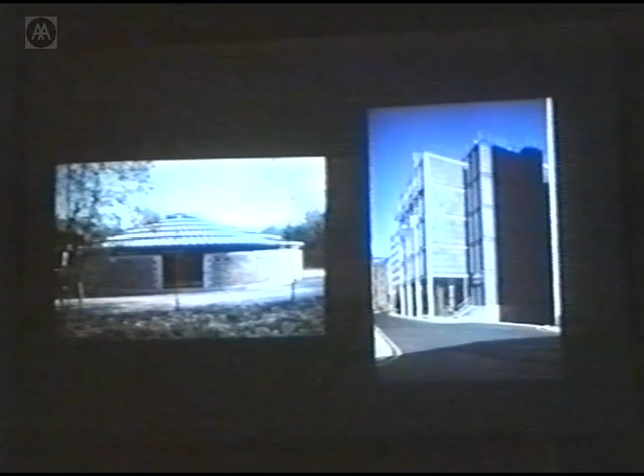This was a building where the name of the game was doing the project quite quickly and very freshly. And it's quite interesting how on other buildings you can use the same materials and some of the same techniques, and they come out with a completely different and perhaps more subtle interpretation. Whereas here, what I liked was the directness of the building.

The site of the building was in Docklands. It's Shad Thames, just near St Saviour's, facing onto St Saviour's Dock. And what we found was the buildings on the right-hand side, and in fact the site was this building and a bit of this. And we had very protracted negotiations with English Heritage to demolish the building on the right, because it was about the only old building in the area, but in fact it had been built for child labour and storing sacks, so there was only a headroom of about 1.7 metres, and it was impossible to use for any other use at all.

And we had absurd conversations with the conservation officer, who was nearly 2 metres tall, who said it's perfectly capable of reuse and was sort of hunched double inside this building. But eventually, after about a year, 9 months of negotiations, we managed to get permission to demolish it on the basis that the replacement building would be an improvement.

The use of the building is really quite simple. There was an apartment on the top, 3 floors of offices, and what was to be a workshop on the bottom floor. Sorry, the slide on the right is wrong. No, it is the right way around. I thought it was the wrong way around.

The plan really was developed around the apartment, and we developed quite a simple format where it was based around a number of individual rooms and bedrooms on the street side, a double height space in the middle that led up to roof terraces, and then living rooms on the other side of the building with bathroom spaces.

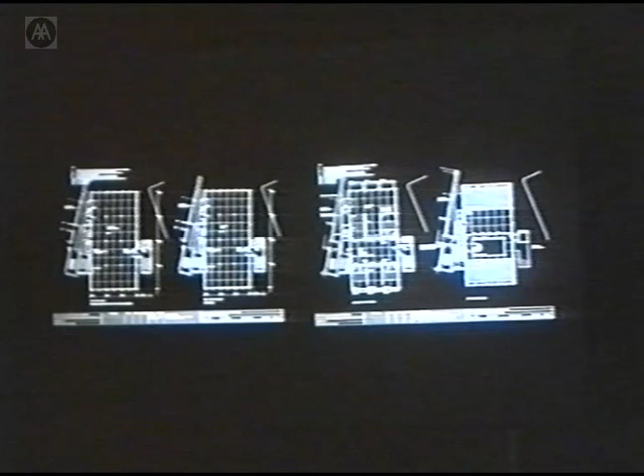And that really dictated the plan form, because that was the most onerous part of the building. It dictated the plan form for the rest of the floors, where the offices and the workshops had much less onerous uses. So we arrived at the plan and the format relatively quickly, and this shows the components of the building, where we had the 3 floors of offices in the middle, the apartment at the top, and the showroom at the bottom with a basement car park.

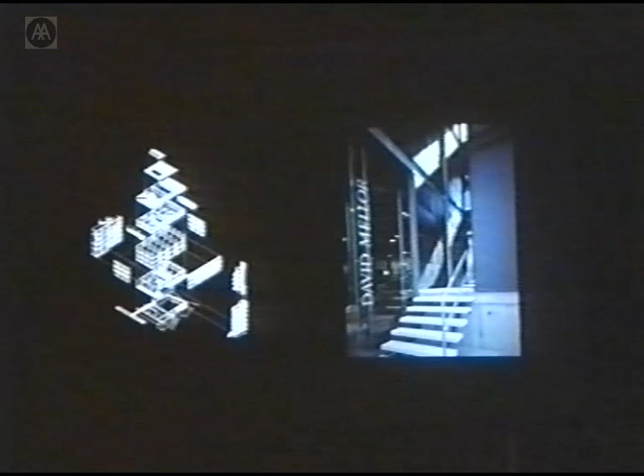And then the construction concept was relatively simple. We had a concrete frame in the middle of the building, the main block, with a freestanding lift tower up the side, and then external cladding panels just clipped into the frame, with a sort of leftover space for services and cores against the party wall. And really the challenge was how to make the best expression of this very simple plan using a relatively limited palette of materials.

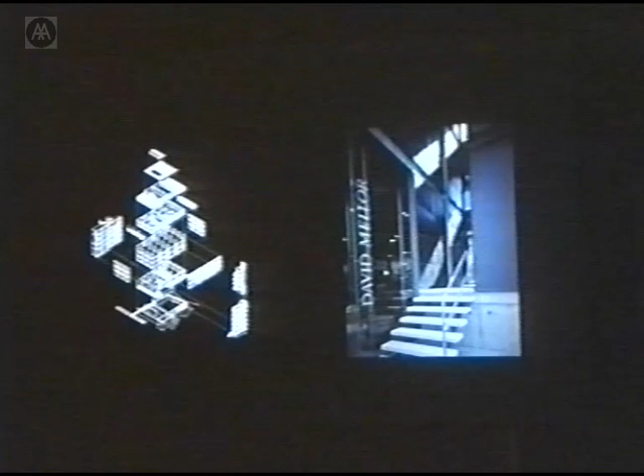And in the end, we settled on 4 materials, which were steel and glass, lead and concrete. And you can see them all in this picture. There's the concrete, and then there's the steel for the lift shaft, and the lead panels, and the glass for the windows. And I think in many ways the materials, taking the sort of culinary metaphor, the steel and glass were very familiar to us. All our upbringing as a practice had been on steel and glass. We knew it very well. It was second nature to us. It's like the sort of sauce that you put into every standard dish.

And then the lead, in a way, was something that was in season, because we'd just had an experience with David Mellor on the Hathersage building, where we had a lead roof, which was prefabricated in panels. And then the interesting one, and really the essay that we developed on this building, was concrete, and how to get maximum expression out of concrete. It was like the sort of forgotten ingredient at the back of the cupboard that needed to be reinterpreted into something more interesting than most associations one has on recent projects.

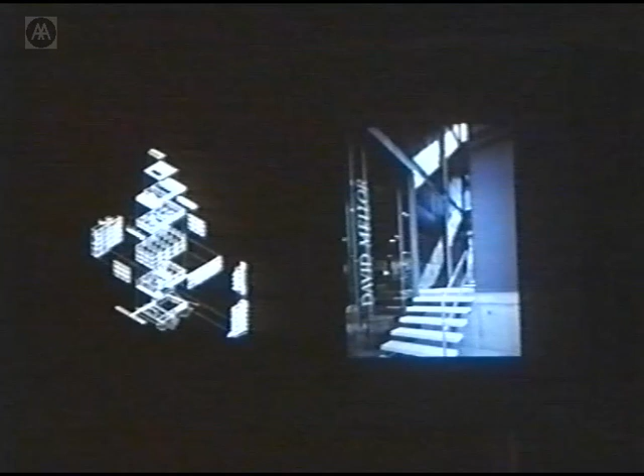And in many ways, the biggest inspiration for us as a starting point was this building by Louis Kahn, the Yale Center for British Art. What appealed to us was that here was a building with a very limited palette, the multi-story concrete frame, that would solve very efficiently all the fire resistance problems, and the concrete also has the potential to provide a fair face finish. In this building, the panels on the side were matte, mill-finished stainless steel, and then inside there's joinery. And that's what we set out to use.

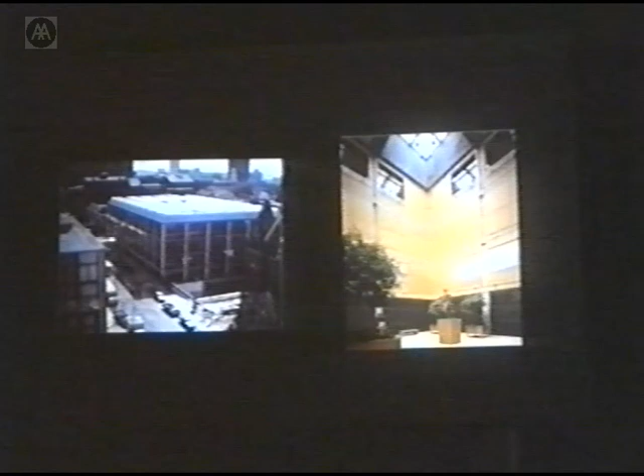We had a romantic notion that with David's work in manufacturing cutlery and the use of stainless steel, somehow we could redeploy that technology on this building. And likewise, we thought at first that we would reuse the timber from the demolished warehouse on the site for the panels inside the building. But in fact, neither of those 2 ideas survived. Interestingly, Louis Kahn himself likened the stainless steel panels on the Mellon Centre to lead or pewter. And we had this immediate experience using lead, so that became the main material of the cladding.

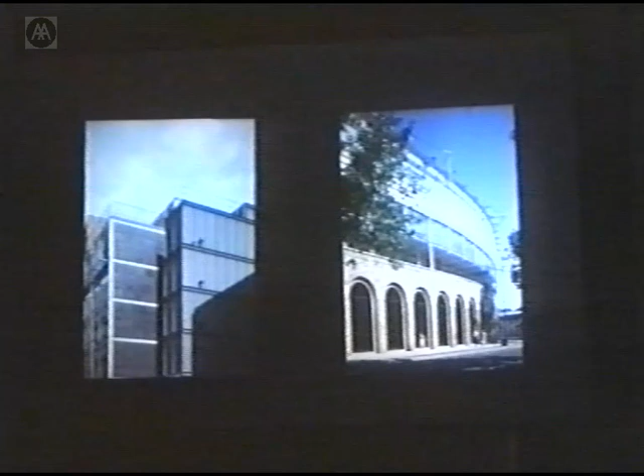Just going through the materials, quite a lot of our work is that we take an ingredient that we've already developed out of the back catalogue. If you take the lift tower here, which is an all metal plate solution, this was something that we'd first developed on Lord's Cricket Ground, where we hit on the idea for a very long span structure. Your structure would also form the enclosure to the building, and you could do that very efficiently, and the aesthetics are developed from the pattern of web stiffeners that you need in the thin steel plate. You use a standard thickness of steel plate and weld web stiffeners on.

And we did the same here. In fact, on Lord's, at the end of the stand, there was a lift tower that was just delivered to site in 2 sections and stacked on top of each other. And we took the same thing on this building as a sort of ready-made solution. We can only really manage one new idea on every project. We start off with a lot of ideas that we've developed on previous projects, use them again relentlessly, and then try and develop something new. And this was one that we weren't going to develop on this project.

And you can see at Lord's, this is a shot during construction where we had the plate girders, which spanned 18 metres along the length of the stand, and they formed an enclosure to the service rooms, which are below the top viewing deck, and below the plate girders were suspended the boxes and the dining rooms.

And then inside the building, this is the Shad Thames building, you didn't need anything. You just had the plate steel, which was painted. We didn't need to insulate it because it wasn't a heated space. And we strongly believe in not solving problems that you don't need to solve. So why bother with insulating it and all the conventional paraphernalia of construction?

This is really a sort of cross-channel ferry aesthetic where you just bolt things onto the hull of the ship. And I think a lot of the inspiration we had for this was from shipbuilding. And in this case, they were bolted together in storey-height sections.

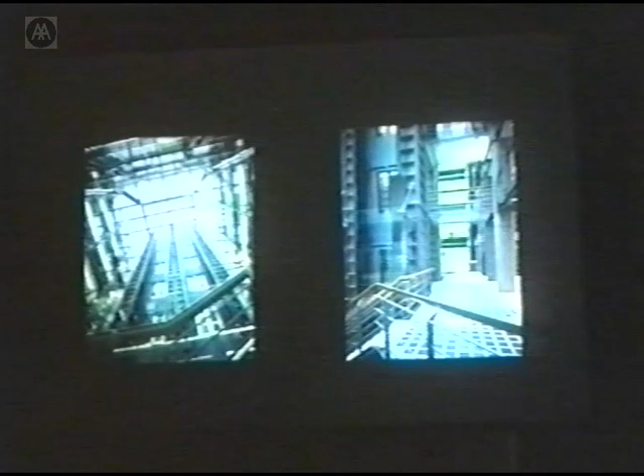And you can see how we've used this idea again at more or less the same time at Bracken House. This is the atrium in Bracken House where we had the lift shafts that supported the roof structure, and they were again plate steel.

And then in the Shad Thames building, the lift shaft, and it takes a lot of courage with this architecture where nothing else is going to happen to it, and the site looks like a pigsty while you're building it, and you see what are supposed to be finished components, and they don't look very impressive when you put them in place, and you just have to believe that it's going to be all right at the end of the day.

But here they were just delivered off the back of a lorry and put on top of the foundation and stacked on top of each other, and then the stairs and the lifts were all fitted out inside.

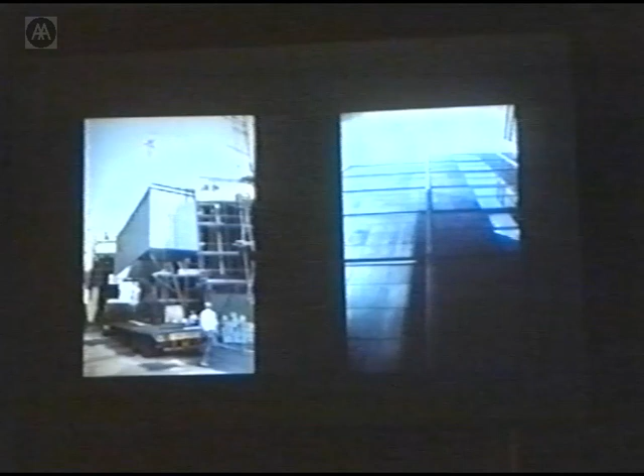So then the next detail and the next technology that we took out of our back catalogue were the lead cladding details. And this is the Hathersage building we did for David. And this roof was made of plywood, stress skin plywood panels that were hooked onto purlins. And then there was a lead covering on them. And in fact, they were all made by David Mellor himself. He was very much involved in a lot of the fabrication of both this earlier building and particularly this later building.

And I think it was the confidence that we had, we got to know lead, and we rather liked the idea of a material, unlike a lot of the materials of the modern movement in architecture, which get worse with age. Lead and non-ferrous metals actually improve with age. They develop a patina, and the appearance in many ways improves. But on this building, we were going to use it as cladding in a similar way to the Khan building, but with panels on the side of the building.

And what intrigued us here was David's background of working with metals, I think he trained as a silversmith, he tortured this metal into something with knife-edge creases, quite unlike normal lead on roofs. And you can see these razor-sharp arrises on the joints. And that, for us, was a revelation. Because one is so put off by lead conventionally on buildings, this metal that's rather difficult to control, and it looks as if it's got the better of the people who are working on it. But here there was a fantastic precision to it, and that we found a complete revelation.

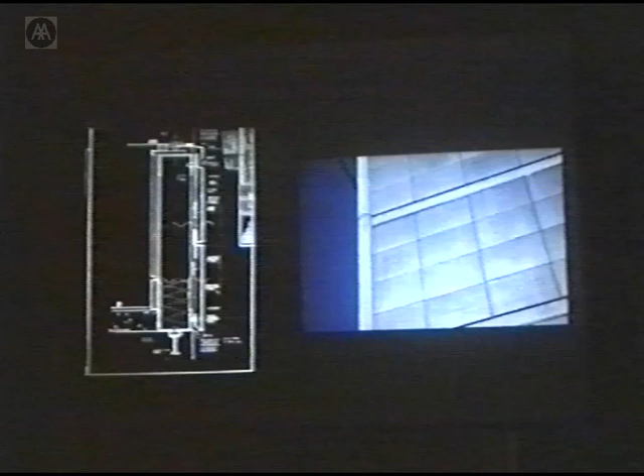And this shows some of the details where we had a ventilated void in the cladding, and David manufactured all these panels, and they were in galvanized steel frames. But in the end, we had plasterboard on the inside instead of the wood panels that we'd hoped for at the beginning. And this is another. This is an internal view where you can see the framework that supported the panels.

And then this was a detail that we used again relentlessly in other projects, having developed it on this one. On the left is the Glyndebourne Opera House, where we had similar lead panels cladding the fly tower. And in fact, the roof is really a straightforward development of what we'd done on the Hathersage building. And then again on the Inland Revenue, there are lead panels up on the top floor. This is in Nottingham. And there's a lead roof again. So this project proved to be an important development of that part of our architectural vocabulary.

And then the next thing that we took out of our back catalogue was glazing, and what we were looking for were just big, simple sliding windows where the building would be naturally ventilated. We wanted the maximum area of glass because the two side walls of the building are relatively solid and the ends were glazed, so light had to penetrate a long way into the building.

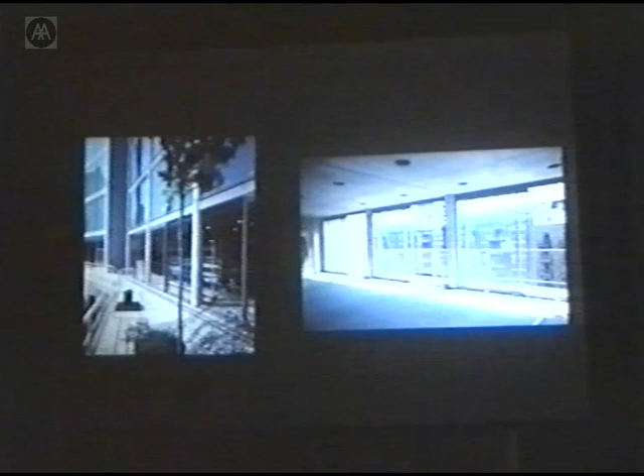And what we used was the system that we'd first developed on the Schlumberger building, where we in fact tried to reinvent far too many things, but we managed to get away with most of them. But on this one, we had again big, over 3 metre high, effectively patio doors, and we thought, well, we'll just use patio doors, but in fact, you find they're never built for anything higher than about just over

2 metres. And so we had to develop a whole new glazing system with Schuco, a German manufacturer, with 13 new extrusions, which had to be robust enough to span the 3 metres and could support this large area of glass. And that was something that we developed on the Schlumberger project, and having sort of sorted that out on that project, it was a pity not to use it again.

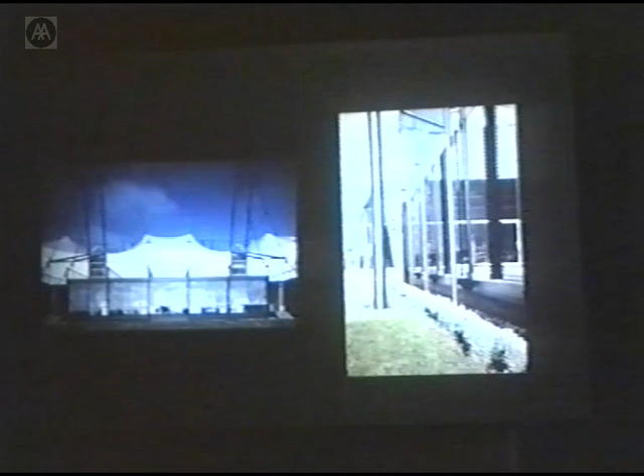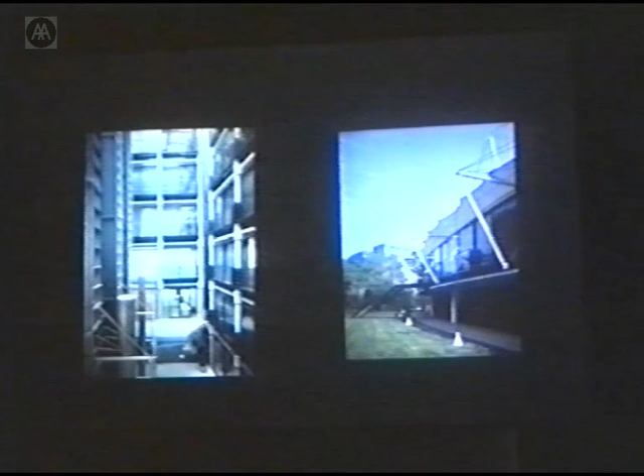And we used it not only on David's building, but Bracken House in the middle atrium space. There were these balconies that faced out onto it with these same extrusions. And then at the Inland Revenue Centre in Nottingham, on the amenity building, we used the same extrusions again. So on David's building, it was just an interim step on the way of something that we had already worked

out. And then again on the roof glazing, we had a ready-made bit of the vocabulary, which was really a patent glazing system that didn't need any secondary support, and we'd first used that on the Schlumberger building at Cambridge, and this gave a very structure-free double-height space in the apartment level of the building.

But the real challenge on the project was concrete and how we could express the properties of concrete. And we'd become very disillusioned with the way that concrete's used in buildings. 90% of buildings you see put up have it concealed behind cavities, behind suspended ceilings, behind curtain walling. You never see the structure.

And the whole concrete industry had become very de-skilled, because no one, since the National Theatre virtually, had ever asked for fair-faced concrete. And no one was used to producing good concrete. But in the aesthetic of this building, where we were stripping everything back, peeling all the layers off the building, everything that was unnecessary, we were anxious to find a way of expressing what the nature of the material is.

And our only previous project that we used concrete on was the Solid State Logic building in Oxford, which was a very simple first floor slab, but it had coffers in it, which you can't see in this photograph, which we cast light fittings into. And on this project, we really wanted to take it a step further.

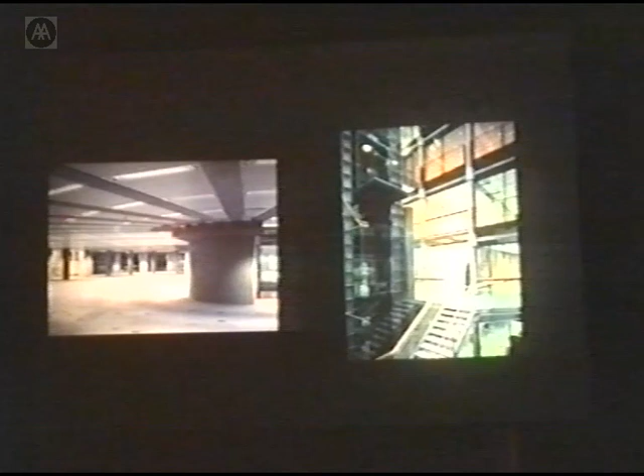And in Bracken House, we had these clear office areas with these columns on a 3.6 metre grid. It was on a radial plan, and they formed cellular rooms around the outside, and the beams were expressed in a very fine precast concrete in the ceiling, and then the ceiling formed air ducts and lighting between the beams. And so we'd had a limited amount of experience with precast concrete.

But in David's building, we were really after something that would express the concrete as a more plastic material. And in fact, I recommend reading Nervi if you want to get enthusiastic about concrete. He's incredibly poetic, and he wrote a book which in English is translated to Structures, but the Italian original means building correctly. He sort of says it with certainty, and it sort of goes from the sublime to the ridiculous.

He talks about architectural education in general, and then tells you what density of reinforcement you need per cubic metre of concrete. But it's a wonderful book, and he's saying that reinforced concrete is the best structural material yet devised by mankind. Almost by magic, we've been able to create melted stones of any desired shape, structurally superior because of the tensile strength to natural stone. Enthusiasm is dampened by habit, but reinforced concrete deserves a large measure of it.

And in a way, he sort of gave one the way of looking at concrete and how you use it, and what's the nature of the materials you're using. And we often forget that concrete needn't necessarily just be the ready mix that comes out of the truck. Although, ironically, on David's building, we did use ready mix, and we couldn't get a more refined expression out of the raw materials. But basically, concrete is stone that's quarried out and ground up, and then the other components are a lot of joinery, which has to be very finely made joinery, and reinforcement.

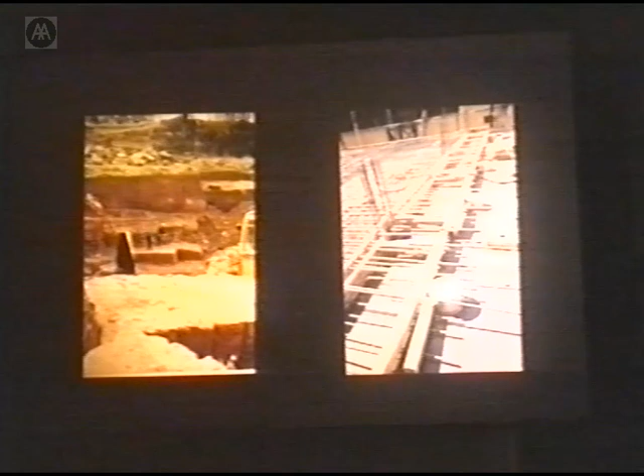The interesting thing on this job was that the client was prepared to really get involved in the whole design and construction process. And we'd identified the key thing about concrete was making beautiful formwork. The concrete is just an imprint of the joinery that you make in the first place. So you have to have a beautiful bit of cabinet work, which is absolutely perfect. And once again, the building site is like the Battle of the Somme or something, but you've got to keep this perfect joinery.

And David Mellor made all the formwork, which was oversized panels of plywood, and with very carefully made joints, which in fact had combinations of aluminium extrusions, which were specially made, and rubber extrusions that were gaskets that were specially made. And all those things created the very subtle features in the slab. It was basically a flat slab. The engineers on the project were Buro Happold, and we worked with Michael Dickson.

And we had a flat slab design, and the essence of it was that the columns and the slab were all monolithic, and we really wanted to see the fact that there was no difference between the walls and the columns and the slab. We were trying to exploit the monolithic nature of the material.

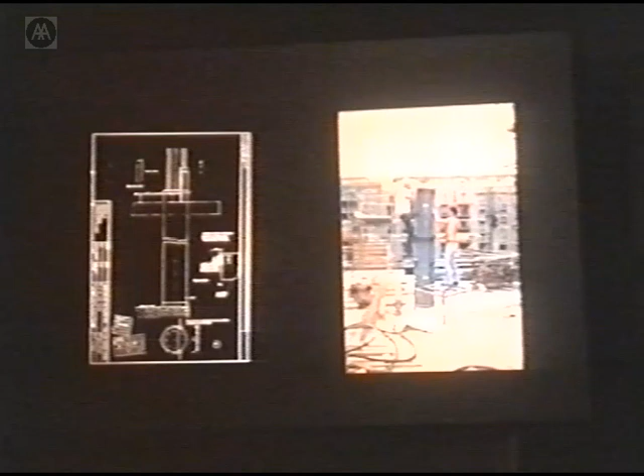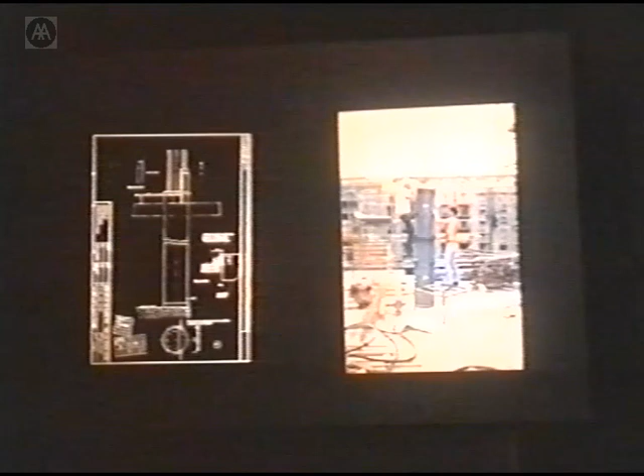And I think what we found, what was incredibly, again, a revelation, was the sort of precision from David's background in manufacturing precision objects, that when they're brought to the building site, we were able to achieve something far better than you could get out of the industry. But the problem was getting the industry to handle the materials properly, because they're not normally used to anyone expecting the concrete to be a finished product.

And we had endless problems with how do you stop the grout loss from the columns, and how do you handle the materials, because everything you do is reflected in the surface of the concrete, and we were anxious not to treat the surface of the concrete in any way. We just wanted to see it as a moulded material and feel the fact that the forms were leaving their imprint in the final building.

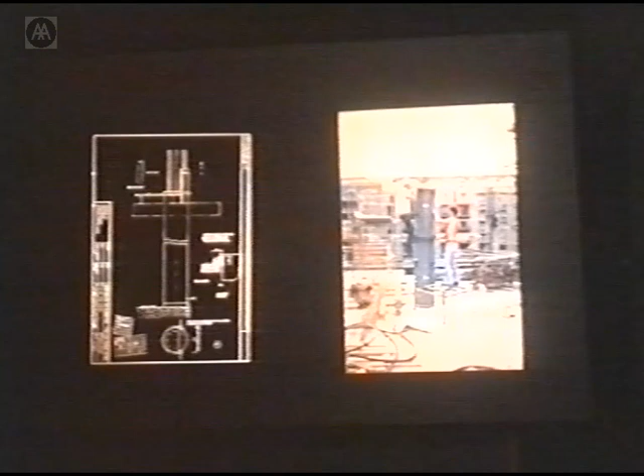And you can see here some of the details. For example, the special rubber collar that was manufactured for this job, and the considerable number of details that were worked out with David. And then you can see again, and these panels needed to be treated with enormous care. You can see here again, this is an aluminium extrusion that was jointing the panels and provided an indentation where we had joints in the concrete between pours.

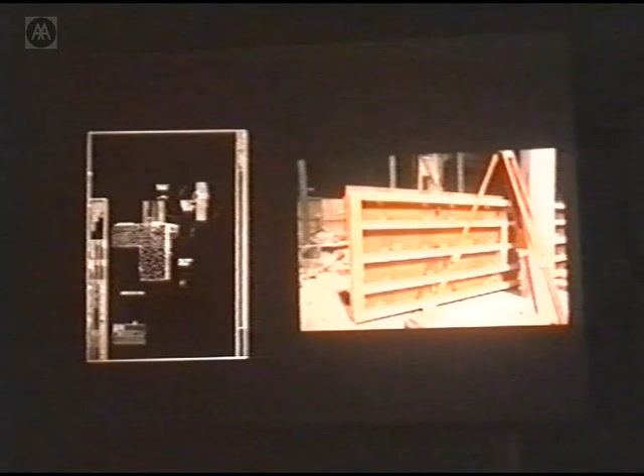And this shows the retaining walls. It's somehow trying to keep a clear head when you're looking on site: what does all this mean on the finished product, and how you can keep it. You've got to keep the forms absolutely clean and in perfect condition, because anything that you do wrong is there for good.

And really, I think the sort of design tools that you need is not just designing it, but it's how to implement the design, because you will never get anything out of it unless you have the method and you can somehow communicate it to the workforce as to what sort of finished result you want.

We had to think about everything, about how the reinforcement was. We didn't want any support off the formwork for the reinforcement cages, so we had these light fittings that cast in, and the reinforcement basically spanned between the light fittings. But it needed a lot of thinking. You had to think about the concrete from the inside out, and then how you pour the concrete.

And we found terrible problems with the type of vibrators that were used, and we asked the Japanese how they did it, and they said they'd given up on all of that, and they just had hundreds of men shoulder to shoulder with bamboo rods compacting the concrete in the bottom of the forms. We could never persuade this contractor to do it, but we could see the reason. For fairface concrete, it's a hand finished job, literally hand finishing.

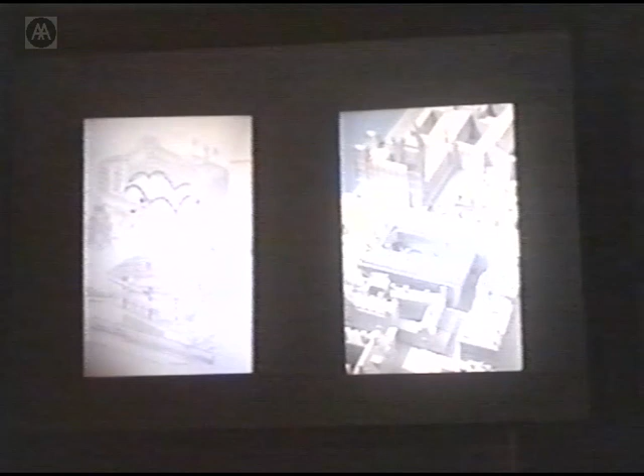Now, it's under the Parliamentary Building, so this is the Parliamentary Building by Big Ben, and at the moment there's a big hole in the ground. And underneath there's this enormous underground box, which is going to be 30 metres deep by 30 metres wide by 70 metres long, where escalators connect the Jubilee Line platforms with the District and Circle Line and the ground. And then above we have the Parliamentary Building structure, which is spanning across onto these 6 columns in the middle.

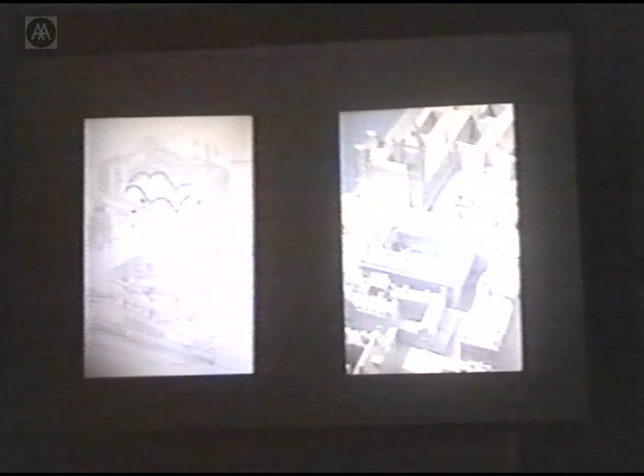But when we came to the techniques of how you construct this underground concrete box, something from that David Mellor retaining wall being demolished stuck in our minds, that actually there's a sort of beauty, like at Petra here in Jordan, where you have these buildings that are carved out of a hillside, and you can see the rock strata running through, that actually you could get some of that feeling of this sort of geology that you're just hacking out below ground.

And when we were talking to the engineers on the Westminster Station job, we discovered that the way that you construct these enormous deep pits is with a diaphragm wall technique, where you excavate in the clay with a grab. This is all engineers' drawing. These are about 40 metres deep, under bentonite, and you excavate this trench, and then you fill it up with concrete.

And what you're using is the clay that's left as the formwork, and then later on you excavate down between the panels of the wall, and then the walls of the station are revealed as the imprint of the subsoil of London, which has formed your formwork. So we thought that this would be the solution. We just accept the fact that that's what the walls are.

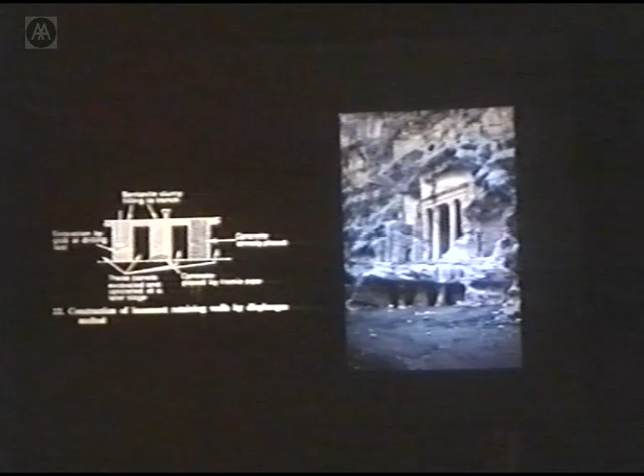And knowing that it was going to be very difficult to control the quality of the concrete, we had almost encouraged them to do these cold joints and these poor mixes of concrete, because you get something of this natural geological effect. And what was quite interesting was at the same time reading Michelucci, who designed this church on the Autostrada near Florence, where he likewise analysed all these old cities, these excavated, natural geological architectures, and he'd done a fantastic blend of natural materials, some formed and some rough, and that was a fantastic inspiration.

And this is the Jubilee Line station, where you have this formed grid of buttresses and waling beams with these flying shores running across the middle of the box, and in these panels here you'll see the imprint of rotten concrete, but purposely rotten and purposely rough, that's used the clay that was excavated away as its former.

Then going on from there, we went on to more structural development of concrete, really regardless of the material properties, what's the structural expression that you can get. At the Compton and Edrich stands at Lord's Cricket Ground, we started developing this aesthetic where you mould the slab to respond to the stresses in the slab, and then the reinforcement pops out of the slab where there's only tension, and you use the concrete where it's good in compression, and the steelwork is pulled out and becomes trusses, which are then embedded in the concrete underneath.

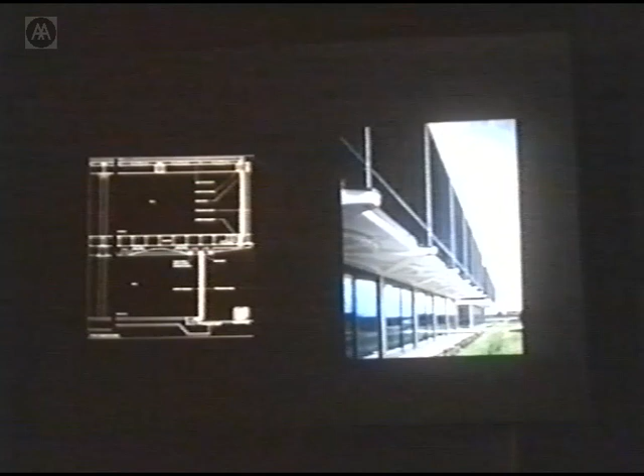And you can see there's the first floor slab, and all the services are up here. It's taking the idea we used on David Mellor's building, where you have the light fittings and the conduits embedded in the slab. Here we would actually form much bigger recesses and express the structural forces in the slab, but also feed the air down from the floor above through holes in the slab, and also embed light fittings in the slab, and once again express it as the structural finish of the building.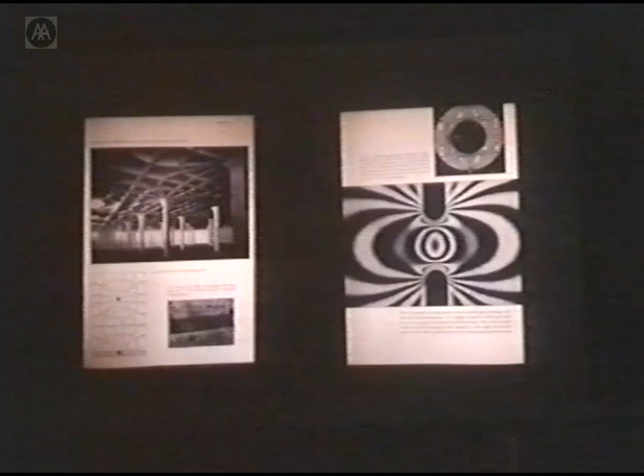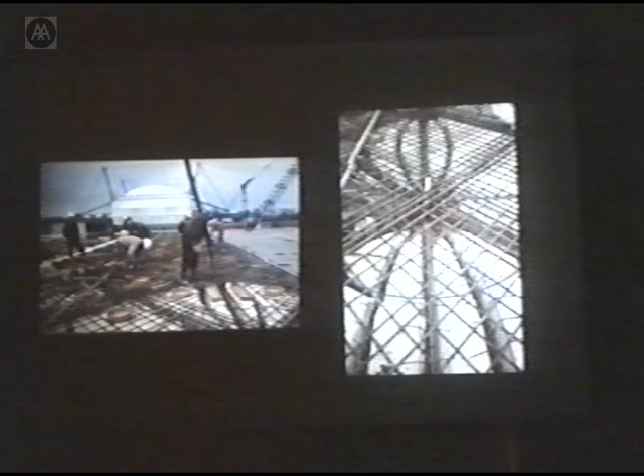And here Nervi had used ferrocement as a permanent formwork that would then form the former for an in situ topping. So we're taking this a step further from David's building. And again, quoting from Nervi, he is very poetic. He can make you really excited about reinforcing rods, because what he says is that you should understand the flow of stress from bar to bar and from reinforcement to concrete so as to channel this flow in the simplest and most natural ways. And the pattern of steel should always have an aesthetic quality and give the impression of being a nervous system capable of bringing life to the dead mass of concrete.

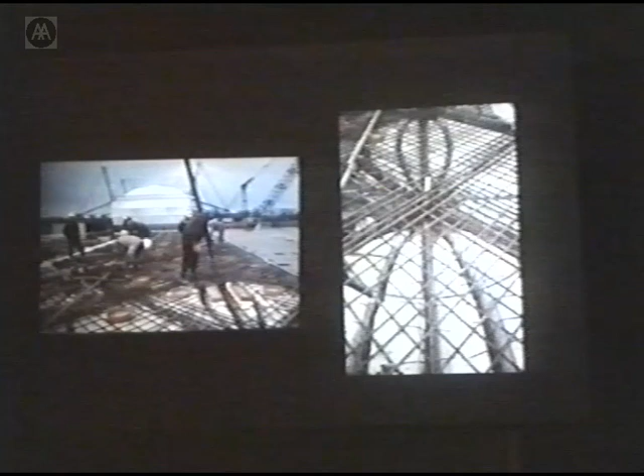And in many ways, I think this is the most graphic example of how you form these ribs in the ferro-cement forms. And then you lay the reinforcement in a pattern. And the reinforcement pattern, in a way, is a thing of beauty in itself, which is then reflected in the slab underneath. And here you can see a lot of the lessons we learnt from David's building, where we cast in these supports, the light fittings and the duct apertures, and thread it in with the reinforcement. This was the finished building, where you could really literally read how the structure is working above your head.

And then on to the next development, really the last main development, is how you use other properties of concrete. Having exposed it and used it as a visible structure, what about the thermal properties? And every time a building's published, predictably, someone writes into the Architectural Review saying there's a cold bridge between the inside of the building and the outside, and how it's ethically wrong for architects to put cold bridges, and that's something that's so energy wasteful in a building. And for us, it's always a paradox to get this very straightforward expression of a building where you expose the structure and strip things back. How much of a penalty are you paying?

And it's something that on other projects we've tried to develop the argument. Well, what is actually happening? Is it so bad? Do you need to solve the problem of a cold bridge? And this was in fact on the parliamentary building. We were looking at stone piers when we thought they were going to be exposed on the inside, and with plenty of engineering software, you can actually find out what the temperature contours are inside. So this is not like the isostatic lines, the structural lines. Here you've got another set of contours going through the same bits of concrete or stone. And what this proved was that it would never reach the dew point, and there would never be condensation. And in fact, the temperature is relatively stable, and the heat loss is really nothing to worry about. And you really need to take an overall picture of the building and stand back and look at what the problems are that you're trying to solve.

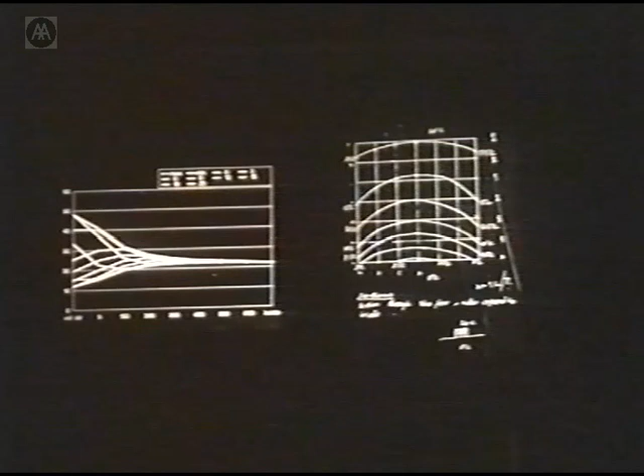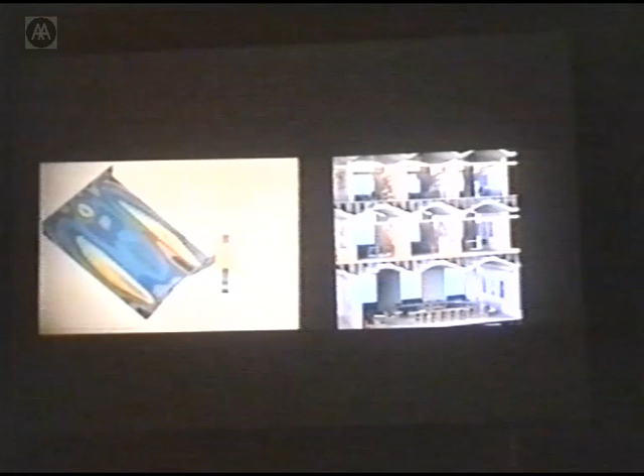And then this is a CFD analysis by the engineers of how the heat transfers in and out of the concrete surface, analysing it as a thermal mechanism. And this forms a very important part, because you've got this fantastic area of radiator in the building, which doesn't need to be very different in temperature from the air inside. And on the parliamentary building, we've really developed perhaps our most sophisticated use of the concrete slab as part of the architecture, because here you can see the slab is there. It's used as a heat absorber or a capacitor.

It discharges the heat overnight. We're also using the underside, with a sort of micaceous sand in the concrete, as a light reflector. So we have light shelves in the window that bounce the light off the slab, and it redirects light towards the back of the room. And so the concrete slab is also part of your lighting system.

It's also linked into the air paths within the facade of the building, so the air is fed in across the floors, and it forms part of the air ducts of the building as well. And it also provides your finish. It's the ceiling to the building.

So in many ways, that sort of experience that really started off with David Mellor's building on concrete is where it led us on our most recent project. But this, going back to the analogy at the beginning, is like the sort of banquet where we've got these exotic materials. You can see again the sort of plate, but this is aluminium bronze plate, and we've got a special mix of concrete, and we've got stone instead of concrete in the columns.

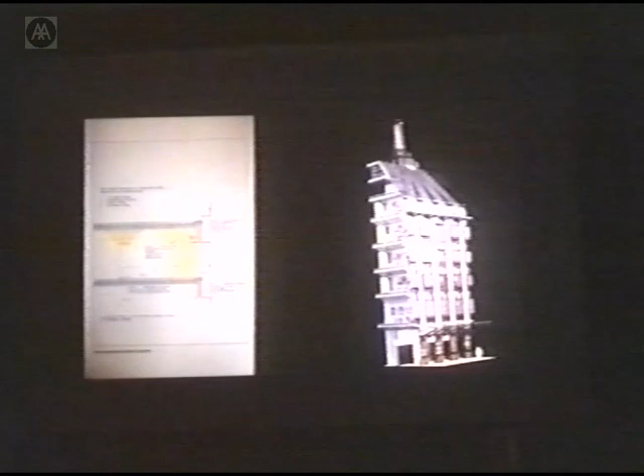And then finally, as a postscript, this is the building as it is today. Terence Conran bought the building from David Mellor and fitted out the apartment, and he's added on a few canopies and things. I think our only sadness is that the concrete that David laboured over, hand finishing, is painted with a coat of emulsion. Otherwise I'm sure it's a good home.